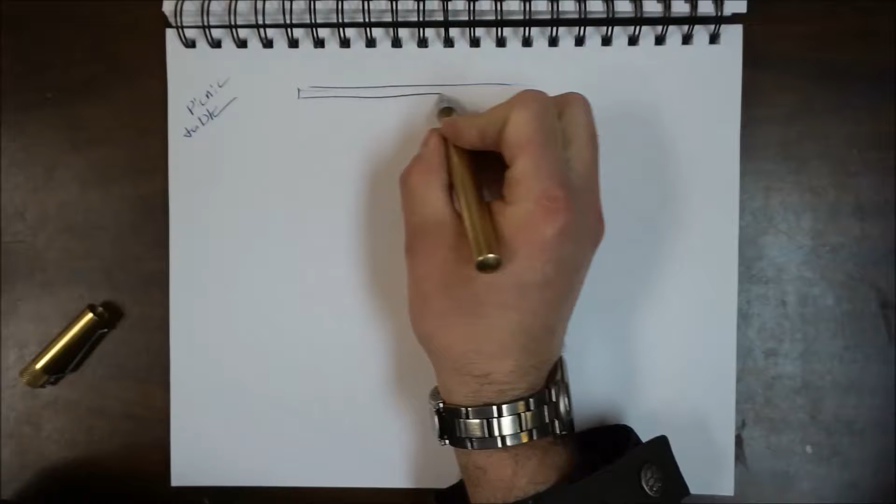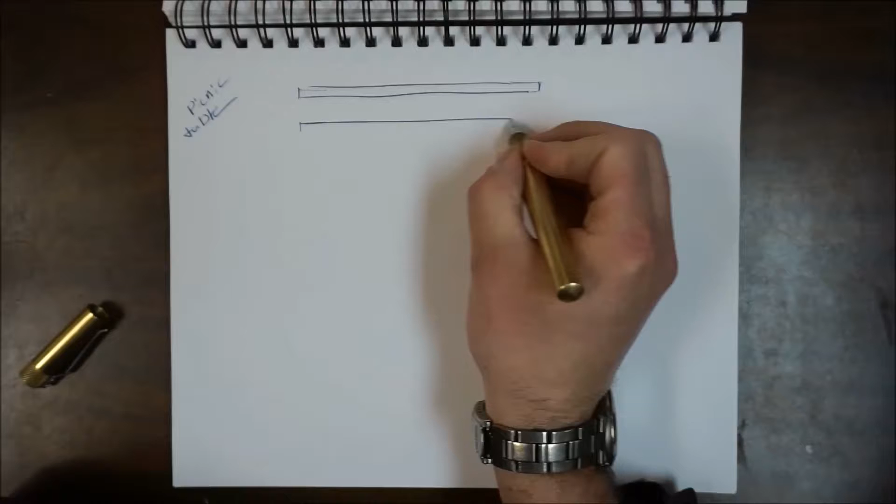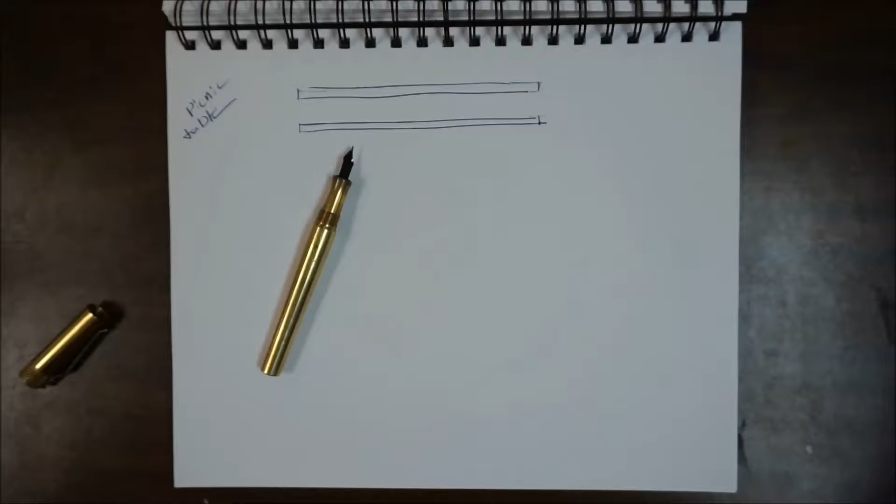First we're going to do just an expansion of the idea we had yesterday. We had our legs, they came down here, thusly. And we can put one in the center.

Basically, there is this point at which wood cannot support itself very well. That point is about 4 feet. So if you're doing an 8 foot structure, you need something in the center to hold everything up.

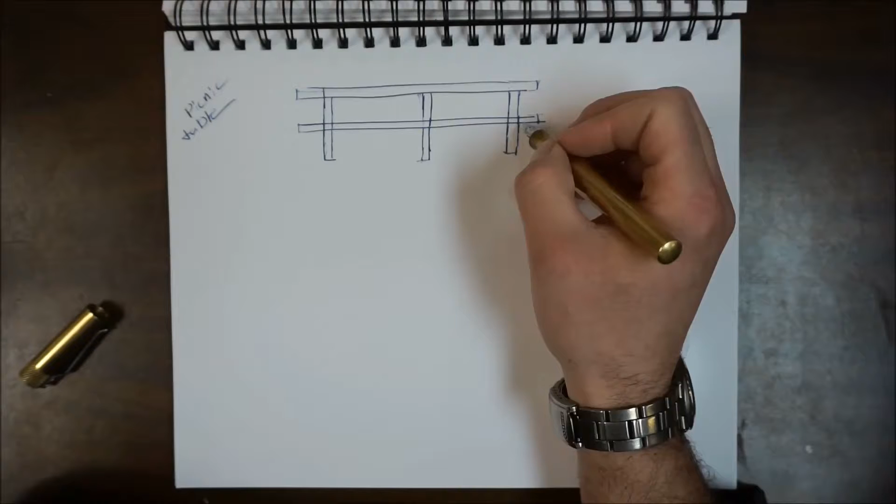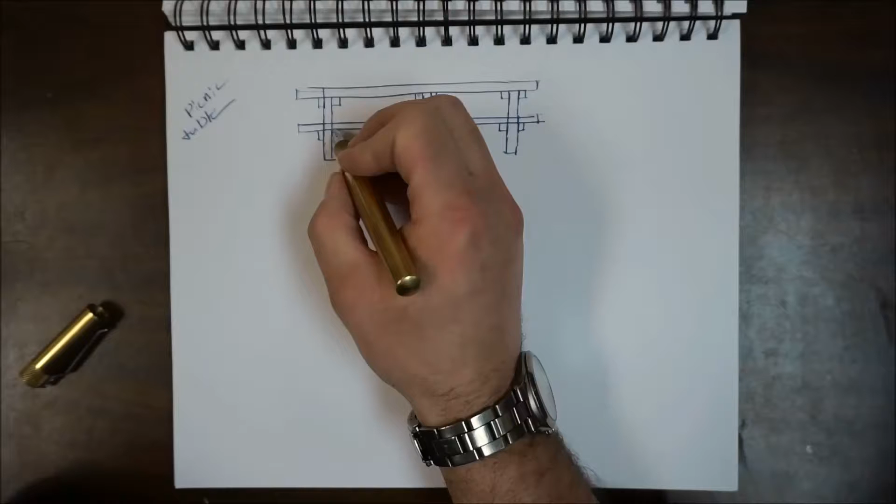Also at this point, I would probably start putting in some sort of support structure. So we've got a cross beam here that goes up from our cross legs here, to give it some lateral stability so it doesn't parallelogram and fall over flat. So this would be a good basic idea.

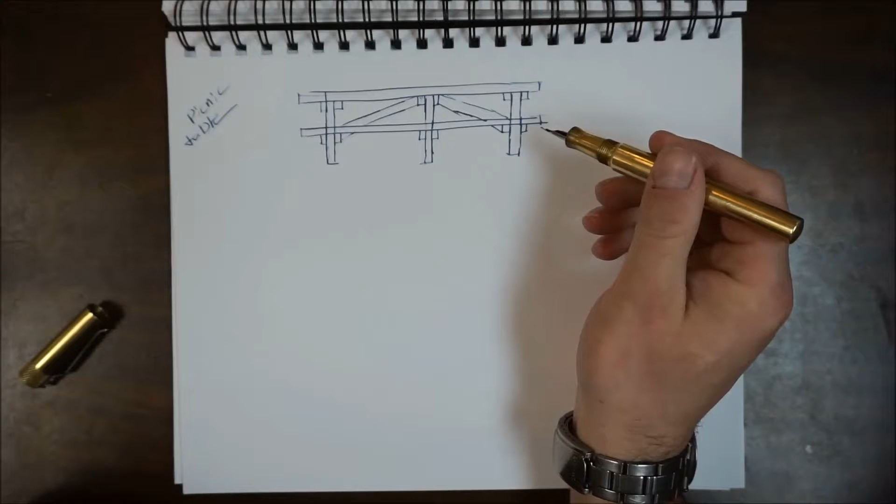Let's take a look at the side view real quick, just to demonstrate that we haven't done anything weird here. This part may not be to scale. Yeah, this part definitely isn't to scale.

Okay, so again we have our cross braces to support everything, our legs, and a seat, and tabletop.

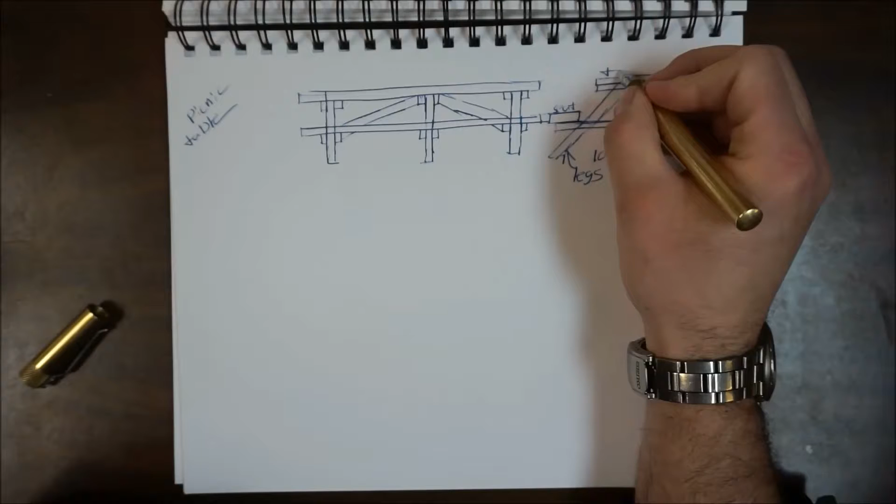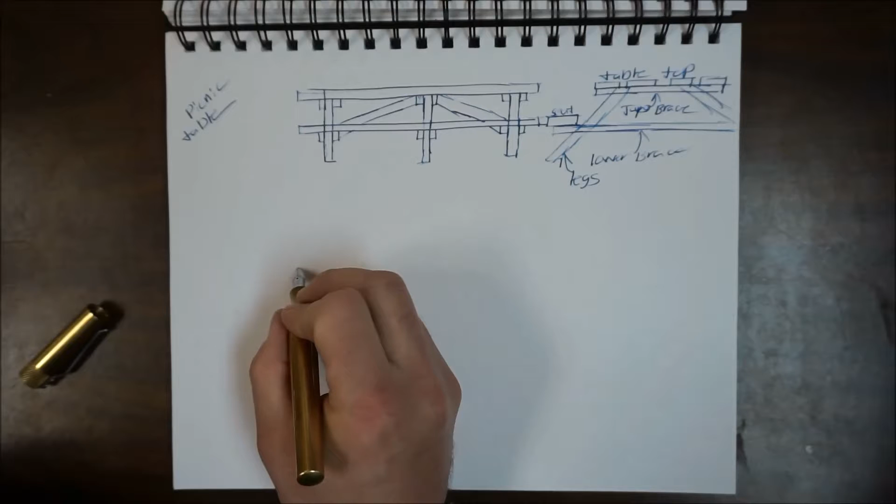So that works. But there's a different idea that I saw that I like a little bit better for a larger table like this. So tabletop stays the same, the legs stay the same. We're only going to use 2 of them.

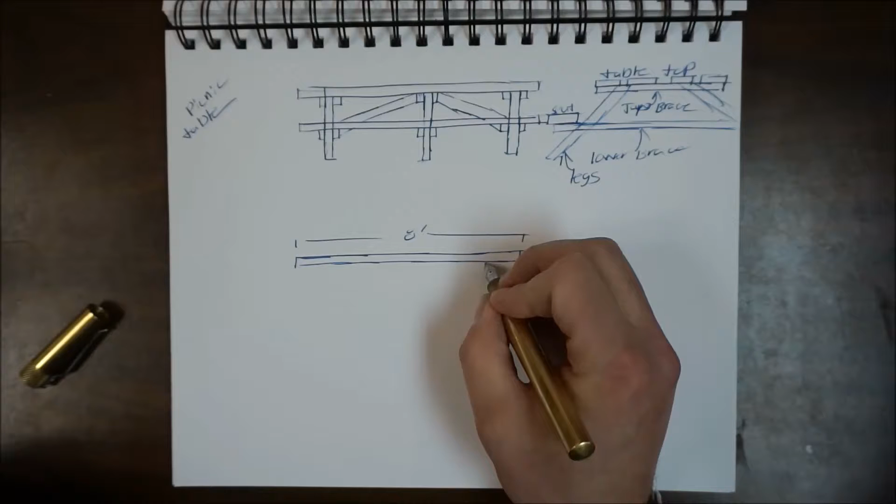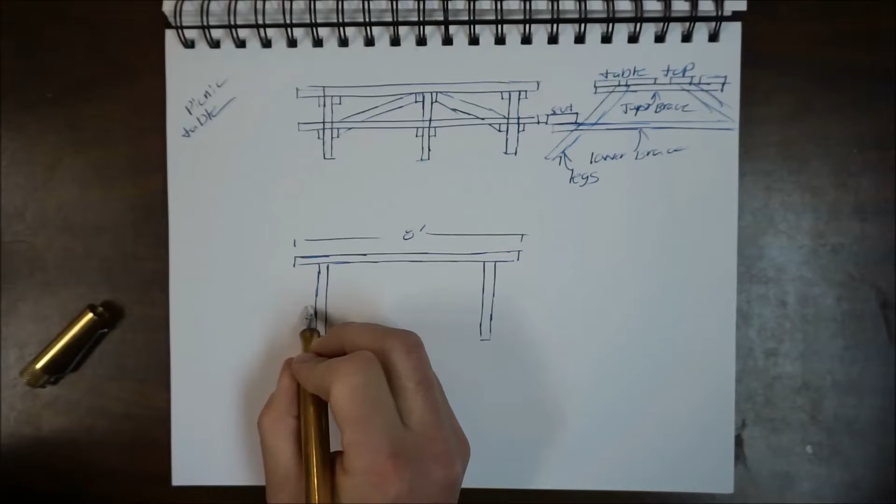And I'll come down right here. Now, what changes is the seats. A big 8-foot table like this is going to have a situation where the person who sits here has to sit astride that leg, and they have to climb over people, and it's just a pain in the neck to get to the seating in here. So it's not actually a particularly usable table. What you can do with a bigger table like this, though, is split up the seating a bit.

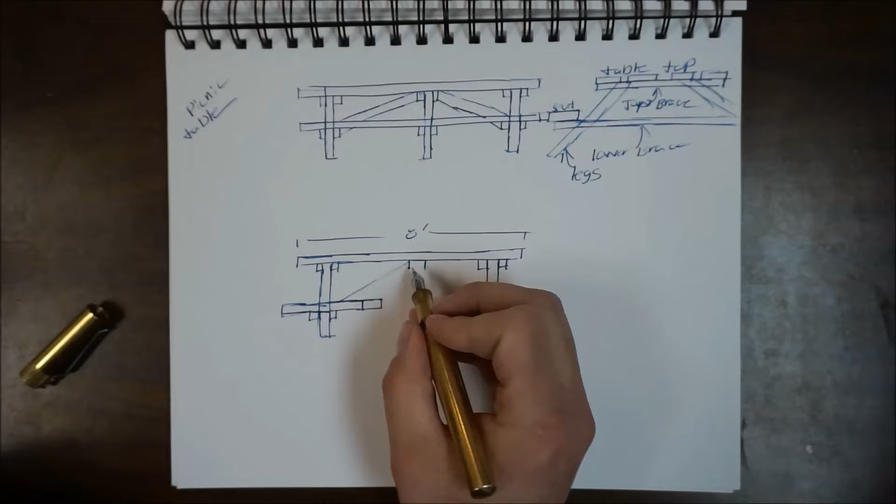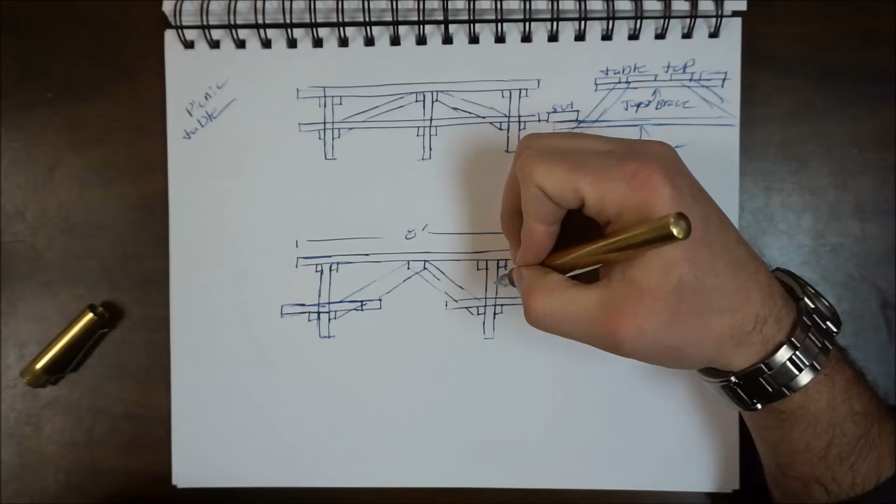I might go ahead and extend that. Yeah, okay, so we've got this. Now, with something like this, it's definitely required that we have sort of a brace across here like this. Before, one of the things that was fighting our parallelogramming, our collapsing of this table, was the overbuilt nature of the legs. But since we don't have that, we're going to have to go a bit overkill for the stability here. So with these diagonal supports here, they are going to prevent the table from parallelogramming and flattening down on itself.

And yet, the people who want to sit here can sit on this side, they can sit on this side, and they can get in without having to climb over anything, because there's nothing here for them to climb over in the first place. So I'm going to call this a split seat table. And this would work pretty well.

And for those of you who are my welding students, let's go ahead and demonstrate how you would do this out of steel. Make that out of steel. Make the little supports out of steel, probably 2-inch material. A 2-inch square stock would work great. You know what? These should probably also be out of steel. Two inches. Yeah, I think that would work.

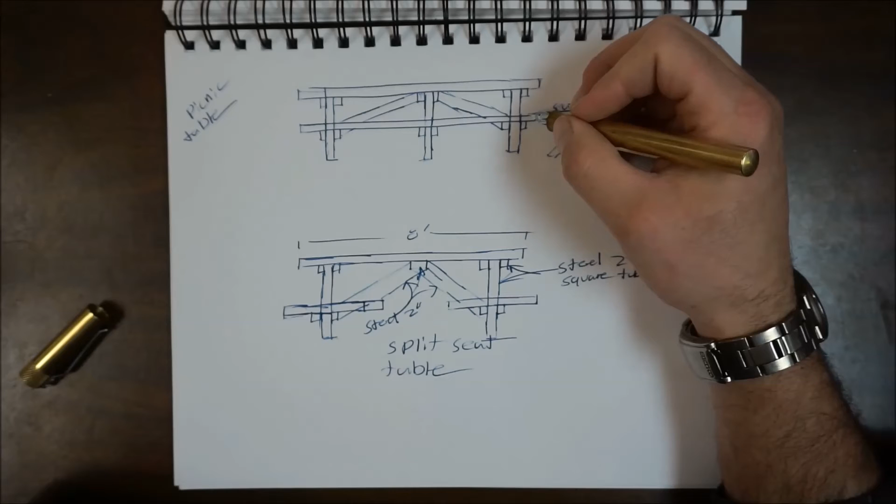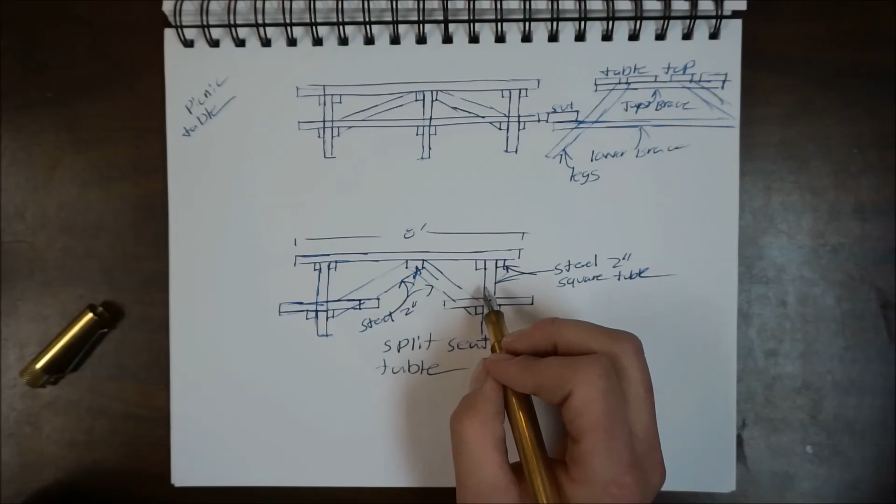So we've got something up here which we can make out of wood or steel that has issues. We have something over here which can be made out of wood or steel, which has other issues, mostly that we're losing about one person's worth of seating here. But if we build additional tables, we won't really lose much of anything. So I'm thinking this is going to be the idea if we want to use 8-foot long tables. Still thinking 6 is probably the better way to go, but if not, we'll go with something like this, with this nice split arrangement.